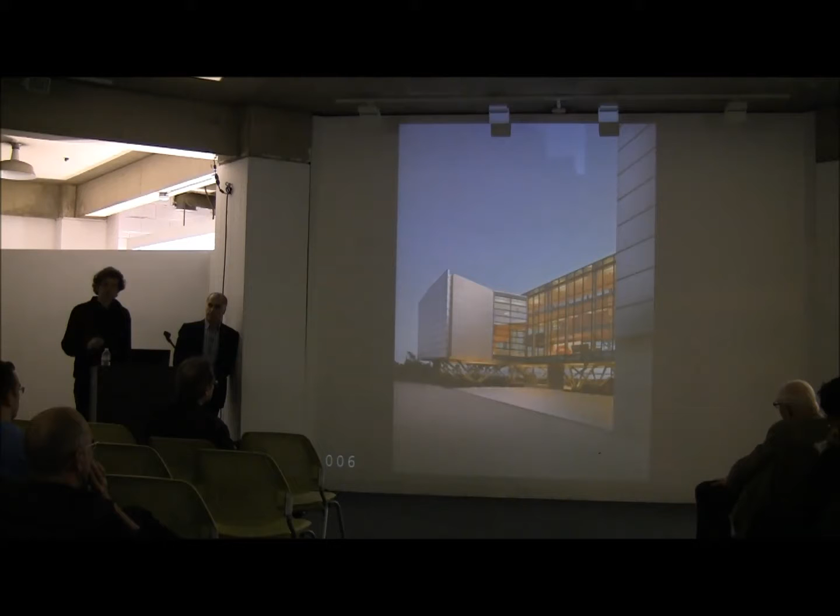And once in a while, as you see, the first house was a residential project. This is the last one we've done, actually in Florida, for a person who, due to a childhood sickness, was constrained to spending his childhood indoors. So he had this dream of living out in the sunlight, with maximum exposure to daylight, and on this spectacular site in Florida, he built his dream.

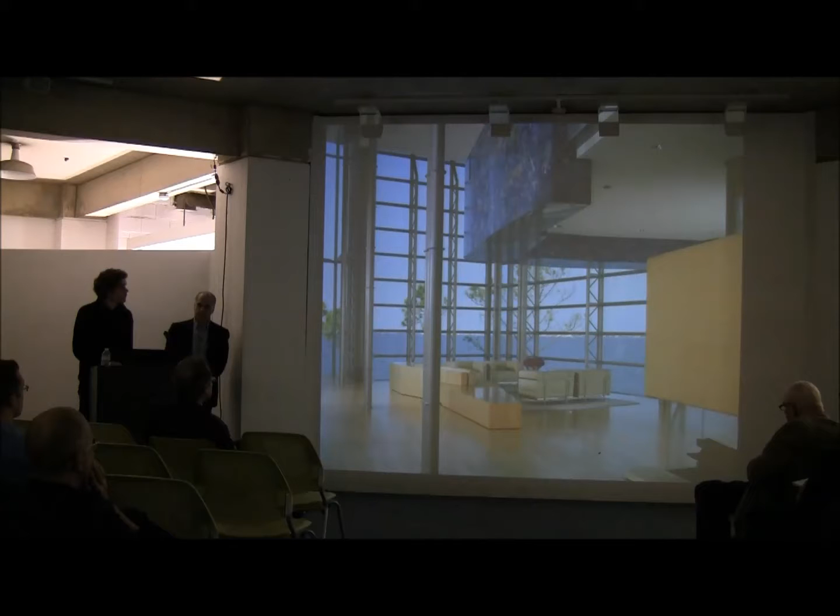This project, in my opinion, when you think of Ron and Mark's work for all these years, is unbelievable because it's pretty big, but it's like the whole house is a piece of furniture, because every inch is dealt with in detail like that. He also happened to be an art collector, so you get a sense of some of the works he bought.

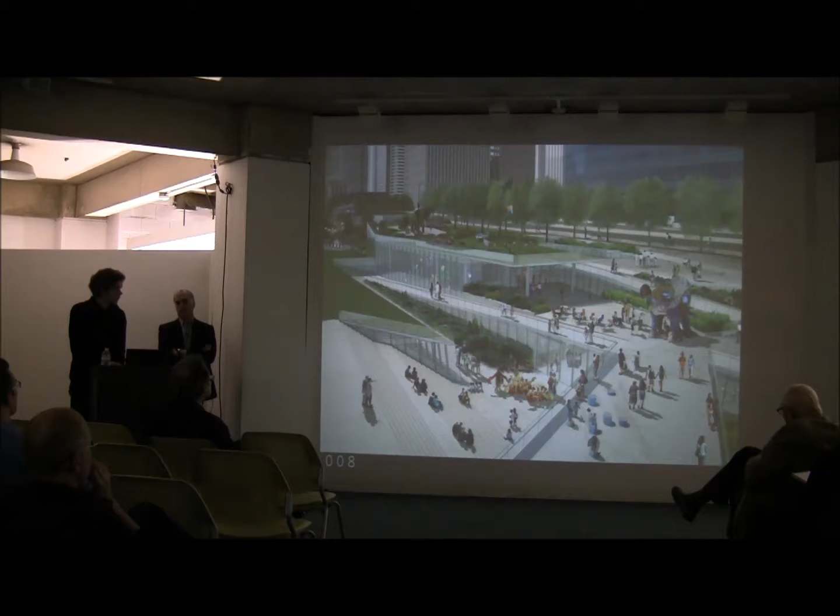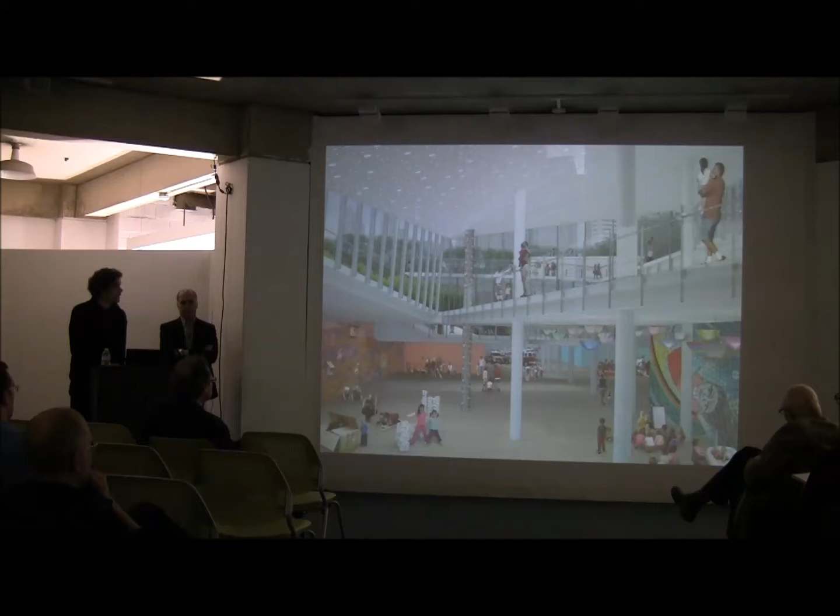Also in 2008, we were in the middle of the Chicago Children's Museum expansion plans, just on Grant Park. So those were some of the renderings. How do you put a building in the park without using any land? That was a bit of a controversy at the time, but it's actually very interesting for us.

Also, in a similar time frame, in 2009, we were one of the four shortlisted firms for the Eisenhower Memorial in Washington, D.C. So this was dealing with a personality like him and trying to figure out what it means. The short answer is basically that we said it's almost like a civic porch.

So you take this idea of this childhood home where he and his family spent lots of time, this great photography, and we suggested that as a solution for the memorial, which was then won by Frank Gehry, and is now completely stuck. Congress has pulled funding, and the future of this project is completely unknown.

So what we'll do is talk about 3 projects in greater detail, and each one is an interesting journey for us. The first one, as so many of you have seen, is the Crown Fountain, which is a great project.

This is what beautiful Grant Park looked like in 1930. Presently Millennium Park is where all the railroad tracks come together, just north of the Art Institute. What's interesting about this image we got from Ed Uhlir is I don't think there's one tree in Grant Park. So it's got the Buckingham Fountain, and that's it. And this was 1998, just a big hole in the ground for people who've been in Chicago. It's a forgotten memory, but that's actually what it really looked like.

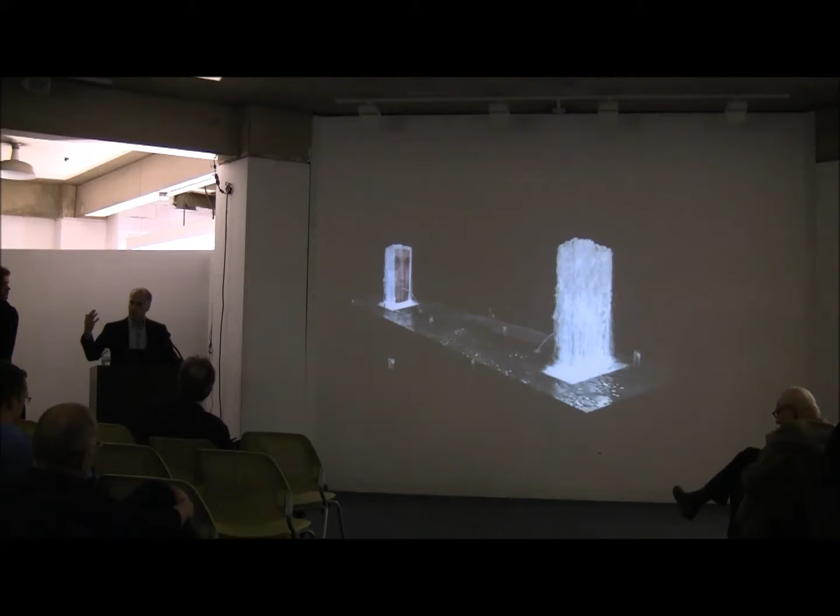You have to understand, you've probably all seen it, but at this time it was just a drawing and this idea. We said, it's so kooky and so unbelievable that it probably won't get built, so yes, let's start working on it. Whether we rationalized it or not, we said, well, they have no idea how to put it together. Like a client who says they want a building of X size with so many things - they had the ingredients, but not the ability to actually pull it together.

So we started working on it, but very fearful of the artist, Jaume Plensa, because we figured well, only an egomaniac artist would do something like this. So it's going to be a stormy relationship.

I showed this image because in some ways it looks really simple - the fountains, the plaza and what have you. And it's simple like ballet looks simple. It's supposed to look simple, supposed to be light and airy and have just a great ease about it. But anyone who's ever tried to do this in their living room knows it's pretty hard to pull off.

So what I wanted to do is talk about the process we went through. The thing about this is we actually came to the project without knowing anything about fountains. We had never done a fountain in our life, but we had this sense of material development that we've always been very interested in. The idea of developing materials in the assembly and working with the artist was a great challenge. Here is Jaume behind our building, looking at glass blocks. Again, it wasn't something you went to Home Depot or Corning Glass and ordered a bunch of glass blocks - we actually had to develop that product.

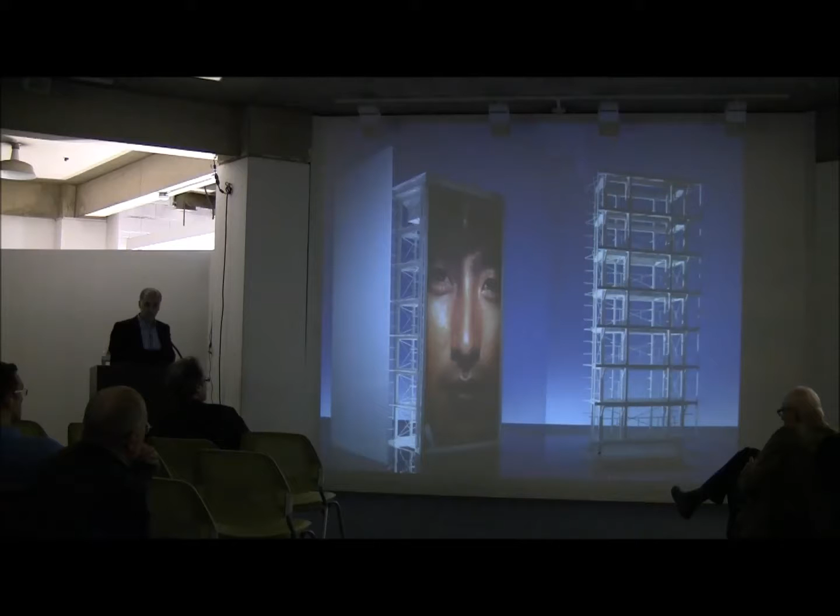The real problem was how you actually get what is, instead of a block, more of a tile. This shows the relationship of the structure in its place over the garage — there was a two-level garage here. You can see the load is taken and distributed on the floor and columns of the garage, and the whole control system is below that.

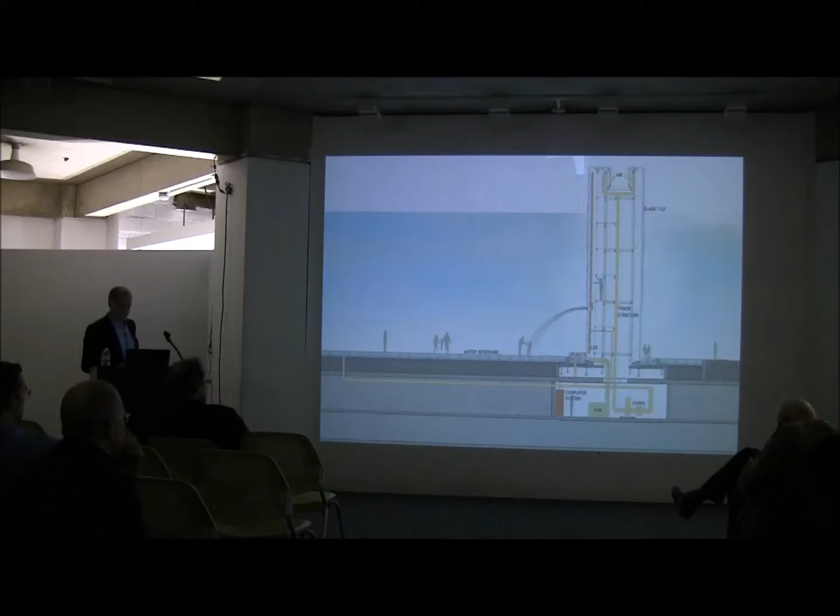There's basically a water reserve of about two feet under the actual area of the fountain, and all the controls are there. So after working on this for several months, we had this idea of how you actually put it together.

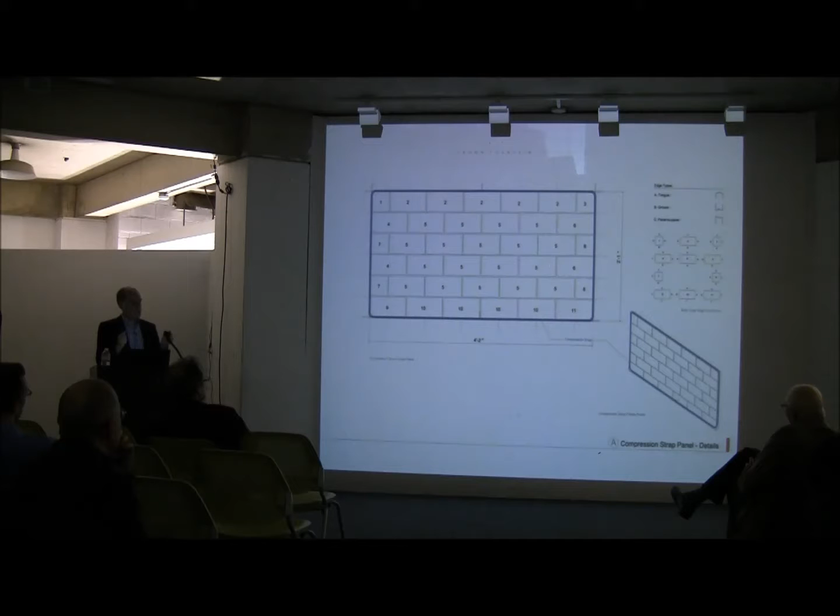We had this great idea of basically taking the blocks, linking them all together, and then putting a compression ring around it. This is a diagram of that compression ring, and on it there would be clips that we would then clip onto the panel.

So we actually needed to mock it up, and this is where we really perfected the notion of mocking up. We made it out of wood because we couldn't get the glass quickly enough. We put it in — you can see here, this is the compression ring, and we decided to make it like this. So there's the panel we were making. We lifted it up, and Steve Crown, who was the patron for the fountain, came in.

He said, yes, we figured it out where other people couldn't — there was another firm that worked a year and a half on this project and couldn't get anywhere, so we were the second firm working on it. He said, you came in and we moved this panel, put it vertically, moved it about a quarter of an inch, and the whole thing exploded. There were blocks all over the floor. To say we had our tail between our legs is an understatement, and Steve Crown is such an incredible person — he said, well, I'm really glad it happened here rather than in the fountain.

But for us, this was a major breakthrough, because it was the failure of this that helped us see the possibility. We said, instead of relying on the blocks here, let's pretend they're not there. Let's turn it upside down and say there are no blocks — we're no longer going to depend on the blocks for the structure. That's what led us to this idea of creating basically a T-net condition.

You can see here the gravity load is held by these T's. The block is simply put in to prevent the T's from twisting, but we're no longer relying on the block itself — the whole structure happens through the T's. It was that failure, like you hear so many times, your parents and professors telling you the failure is where you find the solution. Actually, in this case, it is true.

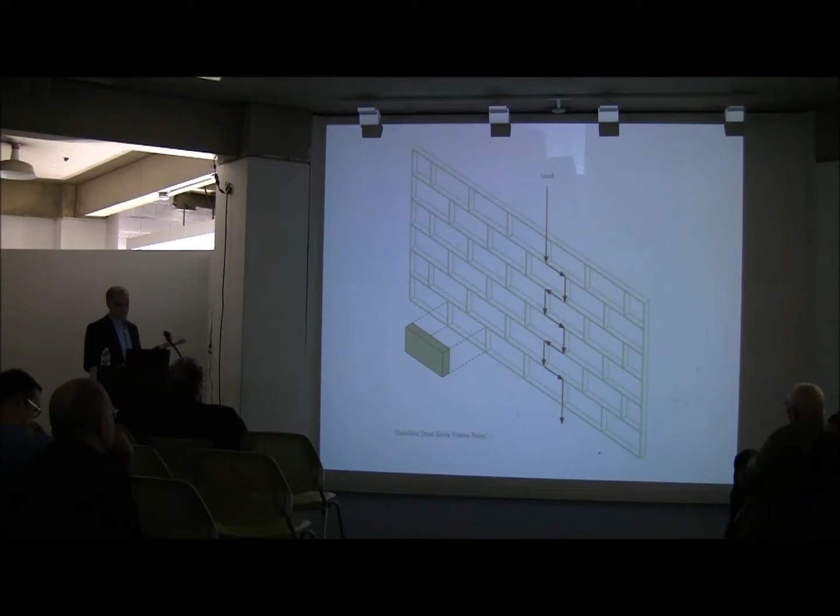By eliminating that, you can see here the actual structure is this T — the T's are on the inside. You can see it's mortised into the glass block, with just silicone on the outside. Again, we're not dependent on the block. This is a horizontal view — you can see that's the structural T, sort of a web. We simply take those T's, glaze them, bring them onto the site, and assemble them.

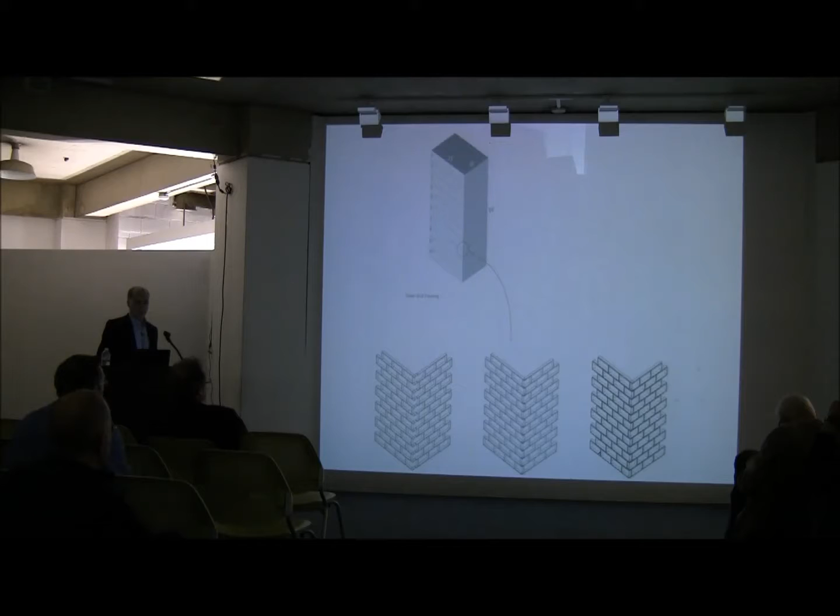So you can see here we teamed with a group out of Florida. Because the dimensions needed to be very accurate, they made a full-size jig to actually make the faces of the fountain.

And you can see them glazing the pieces on the floor. So on the left side is the actual T grid, which is basically, once that glass gets in, it forms a beam, sort of a composite beam that can resist both the gravity and the lateral load.

And the great thing, and it didn't dawn on us initially, but we realized that when we had the block and held it, you would never see our fingers because of internal refraction. You didn't see it, so if you go to the fountain, try to find all that steel. There's an enormous amount of stainless steel in that wall. You don't see it because of how it all works.

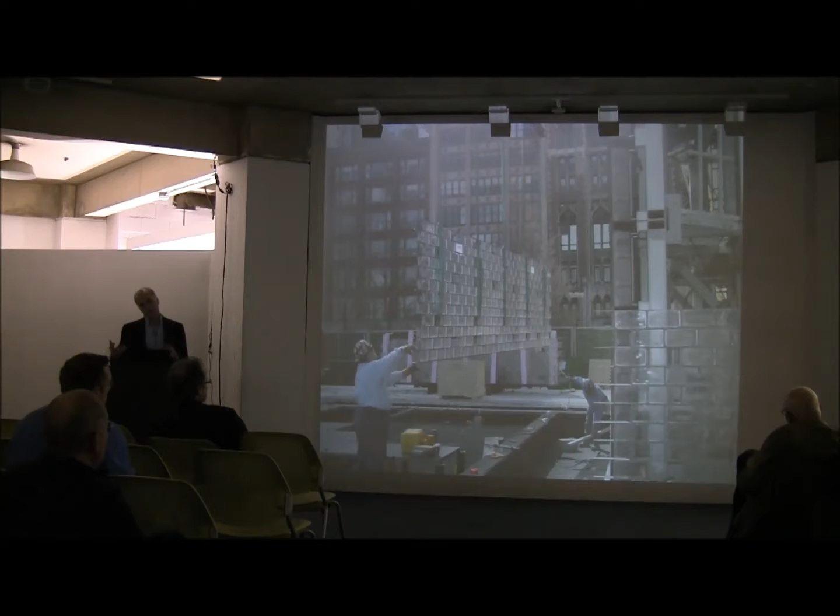You can see the pieces actually coming together. And for us, this is actually a thrilling part of the project because we're actually into putting things together and making it as simple as possible, even something that we didn't have a clear idea of how it was going together initially.

Once it's all done and it's hoisted in place, you can see here the straps, the blocks are left out just to hoist it in place into the glaze. So, very simply constructed. You can see the pieces.

And then the other thing is that the blocks themselves, again, only 2 inches wide. We wanted to have no sort of structural heroics here. We didn't want the structure to be expressed. We actually wanted it to be just very simple and veil-like. So we did what we call these outriggers. They're about 2 feet away from the actual structure, and the idea is that takes the lateral load.

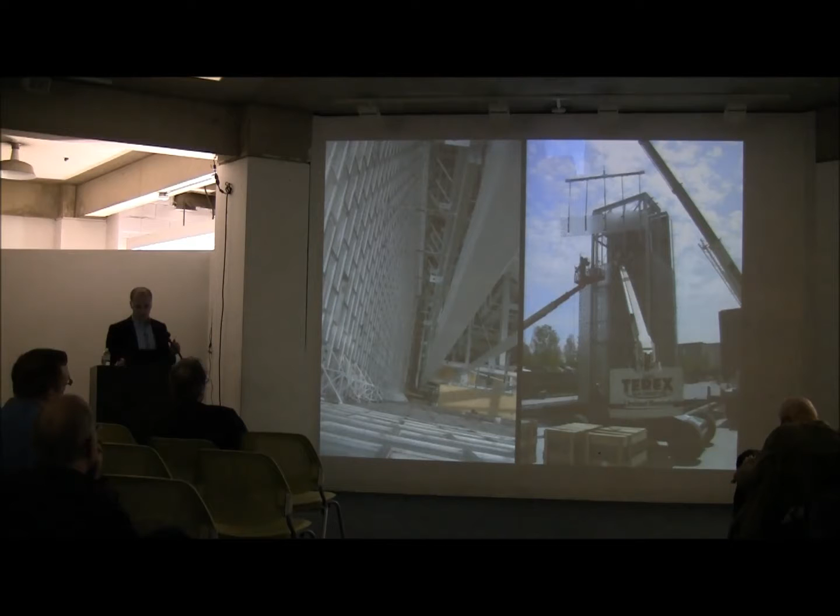So I just showed you how the vertical, or gravity, load is taken through all that stainless in the T assembly, and then this picks up the lateral load. Many fights took place over how many and where they were located, but it was interesting.

And then on the side that has the LED, you have the same lateral loads, so how do you support that lateral load when you have an LED wall? In our case, we kept trying to convince the LED manufacturer just to put a hole through his LED, and he kept telling us that would be a million dollars in re-engineering costs because it's all a component, sort of like putting a hole through your laptop computer, a little hard.

So we came up with this idea of just creating a little bit of a gap. And he assured us, the manufacturer who was an expert at LED, that you wouldn't see that. And so you can see it going up here.

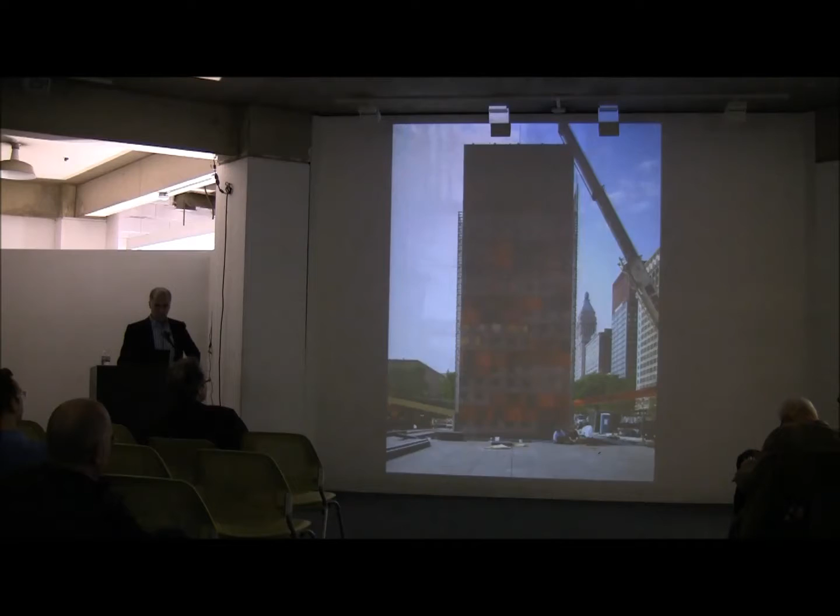We mocked it up again, the different types of LED behind our office. This is actually everyone together. That's Steve Crown in the tie, and then Jaume Plensa looking at it and making sure, the actual visual of his piece. Turns out that we became great friends through this process.

I mean, it was a great relationship, working with him and realizing what was his design, his concept, which is, I think, magical beyond anyone's expectations, but actually trying to fulfill what his ideas were. So authorship of the fountain was never an issue. He was the author of the fountain. We were simply the translator of making it physical.

But we think that's actually what architects do. They become the translator and make things physical. They create space. So in this case, there's the technology of the LED panels.

You can see here, this is sort of a shootout between two manufacturers in our alley. And then, because we weren't sure at all how it was going to perform, we had no idea, we actually mocked it up in the park. So it's about 20 feet high. We've got some panels of glass, and then actually put it up.

You can see the Pritzker Pavilion has no stainless on it, it's just the trusses for it. So we had the opportunity. And the great thing, again, working with someone like Steve Crown and the entire Crown family...

They wanted to always do the right thing, so this idea of sort of mocking it up and saying we don't know what to expect until we actually saw it was very important. And then we actually mocked up the entire screen just outside of Salt Lake City.

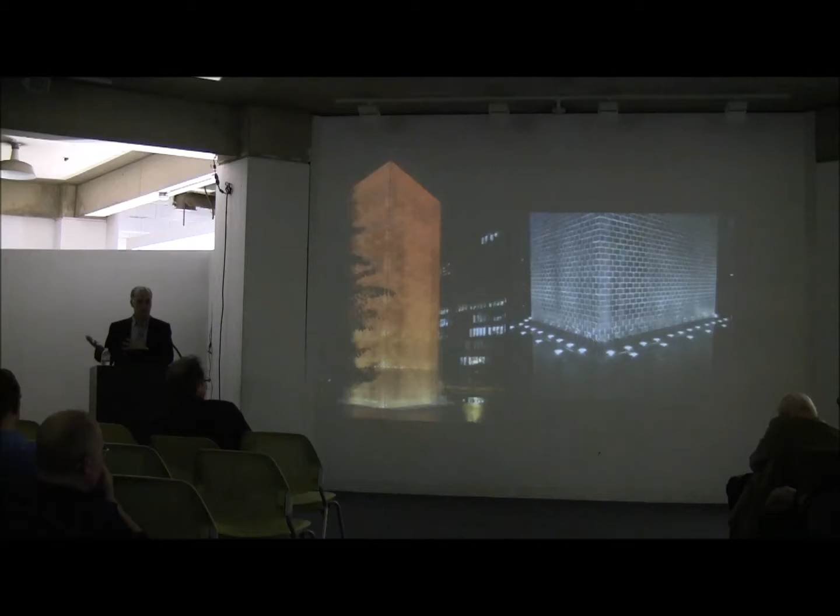Unfortunately, giving this fountain to Millennium Park or the Park District is like giving a Ferrari to a 14-year-old teenager. They barely get the gas in it. In fact, the story is you're supposed to clean out the filters like twice a day; we checked and it went months, and we still can't believe there's not some public health crisis, because given how that fountain is used, it's amazing.

And I just added these pictures of it, all of which you've seen and probably experienced.

But I think for us, this was like a profound change because it showed in a really physical way what art and architecture can do, and the power of art and architecture to bring people together, to celebrate life, to celebrate the physical and to celebrate something that is an event, and it's very simple.

So I think that's the thing that we really took away, and this became sort of a benchmark for us about how it would work, how a project could work, how even in a dormant period, winter in Chicago, a fountain can still be alive, how it's framed by the sort of beautiful gilded frame of Chicago architecture, how it really is used to celebrate life and to celebrate an event.

And I think this last image of the young boy became a profound sort of snapshot of how powerful our work can be. When you do an office building, even a house, it's not quite as single an image as powerful as this. So we ended up using this as a benchmark for how we judged other projects.

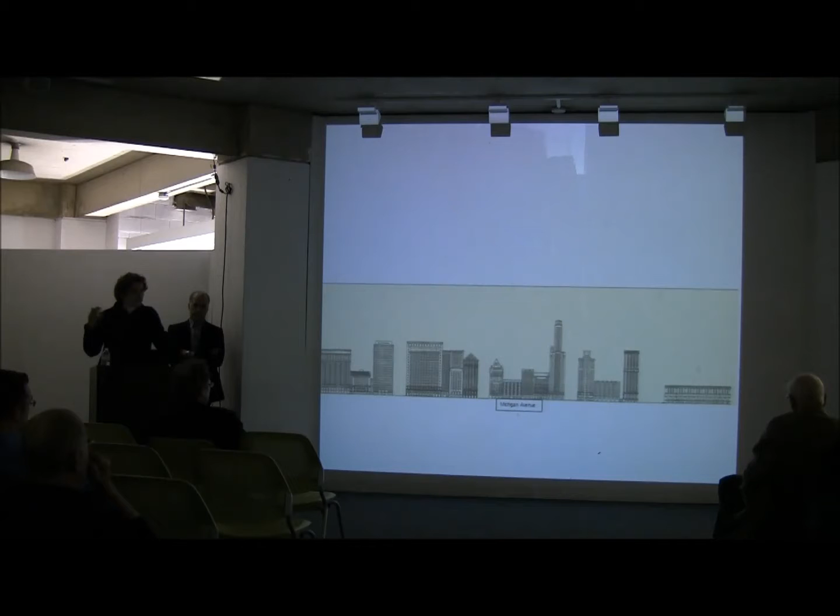But fundamentally, we thought it has to be contextual. I mean, if you have a street wall of that quality with a number of buildings by Sullivan and Adler and Root and so forth, there has to be a relationship to it.

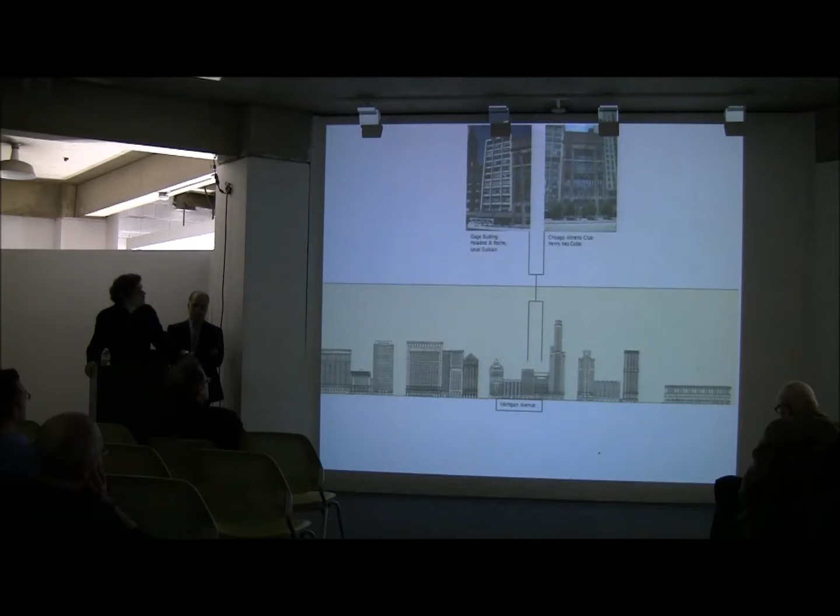And so as we did some basic research, looking at the kinds of buildings that were there, we noticed how, when you go up closer, how rich these facades truly are. I mean, they sort of look like punched window openings at first glance, but particularly if you look at something like the auditorium building, there's an incredible depth in the facade and a richness in expression, and quite a few of these facades are actually sort of modulated in and out, basically bay windows that were used in series.

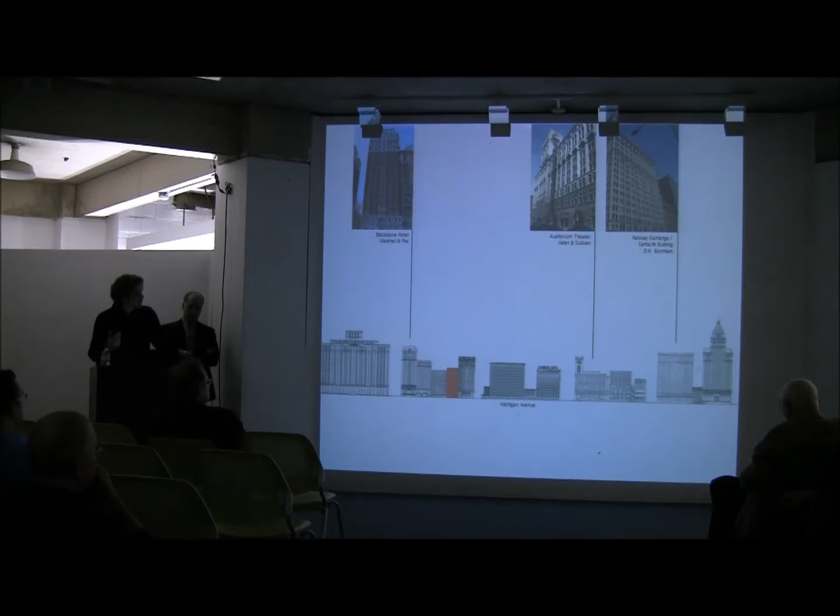And so that led us to think that there had to be some of that spirit in our model. Here you see some of these close-up shots where this articulation shows why the auditorium building is a great building. For us, it became clear because the people at the time, Sullivan and his parties, basically used the materials of his time to the greatest extent possible, and the way they articulated the stone, the colors they used, achieved a real rich appearance.

And in addition, this is something that both Ron and Mark have held dear when we talk about modernism—there's also a great interest in art in particular.

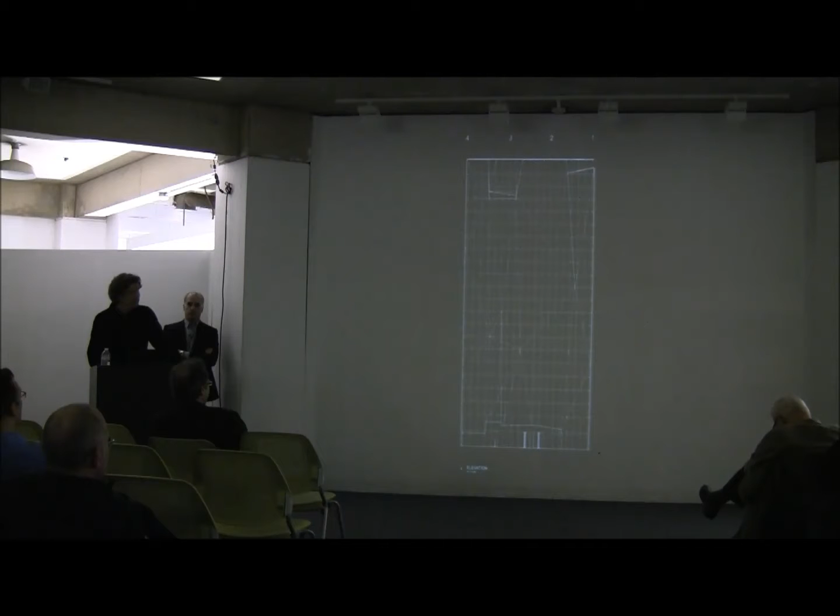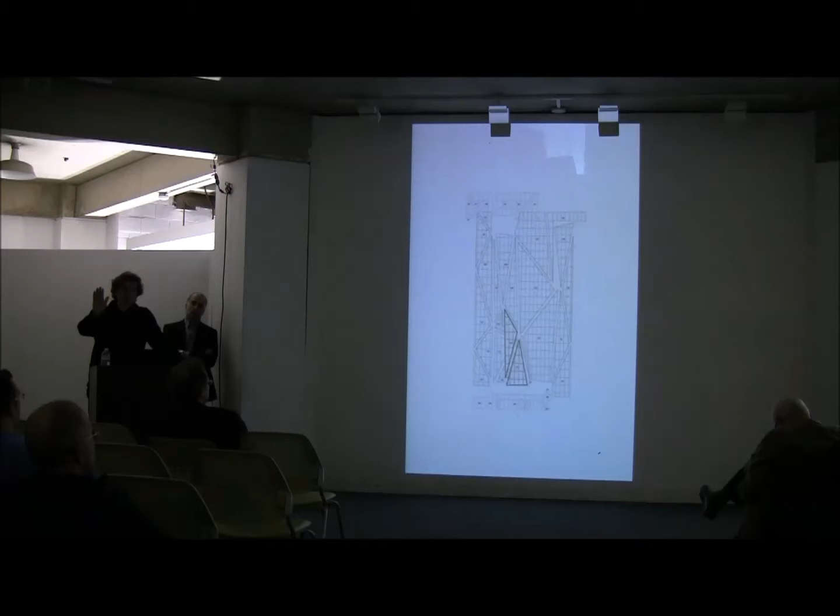So here you see some of the development of the facade, just in a plain elevation drawing, and then the pieces, basically the facets that make up this geometry.

As you pull these pieces apart, I think the story here is too, when this rendering was shown to the mayor, this was a meeting I wasn't at. We were expecting them to say you have to tweak it again, but they all said, yeah, looks great. Then the challenge was, since we're talking about making it, how do you actually make it? Yeah, we had no idea. We just sold it to the Spertus Institute and the city, and because we thought for sure everything would be rejected since it didn't have red brick and wrought iron. We got the approval, and we said, oh my God, now we're really in trouble, because we had no idea how to put this thing together.

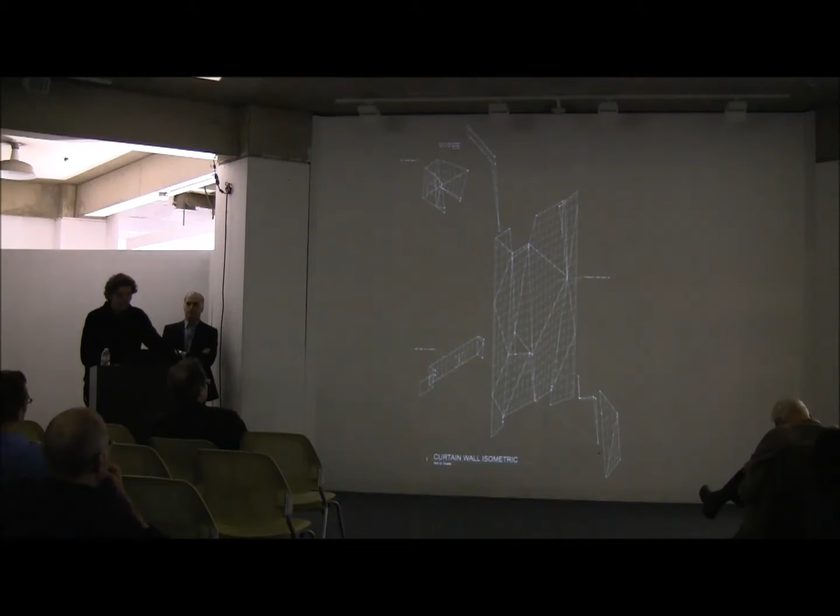In that sense, it's interesting compared to the crown fountain we just talked about. The crown fountain was basically a series of planned failures, mocking up and trying and finding out through that. It turned out not very different here, a little more traditional as a curtain wall, but it had a lot to do with testing in real time. So the fundamental issue was when you have a geometry that zigzags in plan and also leans both ways in section.

If you just took regular curtain wall and tried to stack it up, it doesn't work, those mullions are always going to misalign. So the breakthrough here, in very close collaboration with curtain wall engineers, was developing this mullion as an aluminum extrusion, one piece where the alignment is always exactly the same. You can lean in and out, but that radiused front of the mullion allows all the various geometric alignments.

You can see how that same mullion works through a very simple change, you just swap out this one piece. You need a bunch of those to allow for all the angles, but everything else stays the same. That was part of the way to make it work, but also make it affordable. Ultimately, the outcome of all of that is this faceted glass geometry that you've probably seen.

It's also the whole idea of, I think when we decided to go all glass, we were always amazed by the view. This is actually one of the few buildings in the South Michigan Avenue stretch where the public can go up, and then you look back over Grant Park and Lake Michigan. So that was always a big part of the idea.

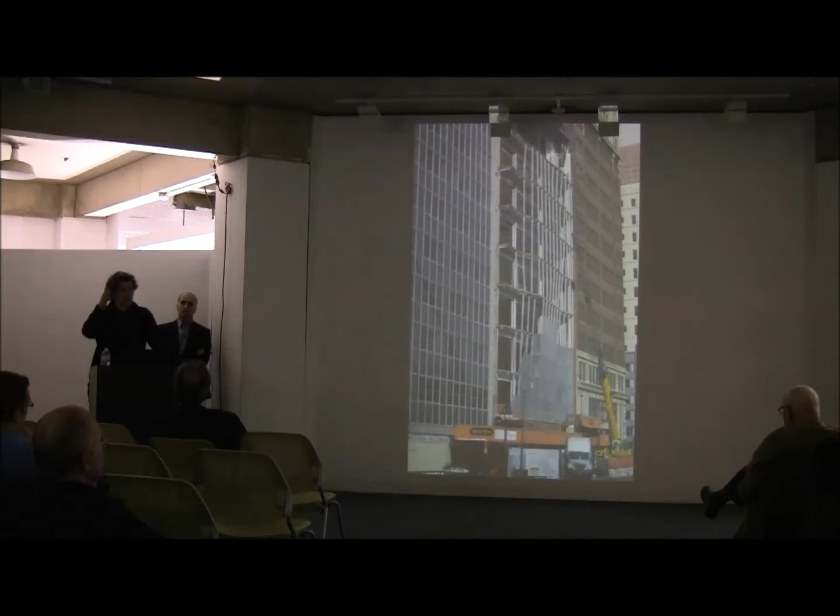There were some scary moments, but the other amazing thing is this highly articulated system actually went together incredibly well, much better. This is a very interesting lesson. This went together way better than like an acoustical 2x2 ceiling tile, which has been done for decades and you just pick it out of the catalog. But there was actually this sort of care of the engineering that went into this that made it go together real well, and the ceilings looked—you know, like they were misaligned, you had to almost fight as hard for them.

I think what we tried to achieve, in addition to giving expression to Spertus as a Jewish institution, was a building that represents them, that has an appropriate expression of the Jewish experience. And so that had a lot to do with the folding of the facade.

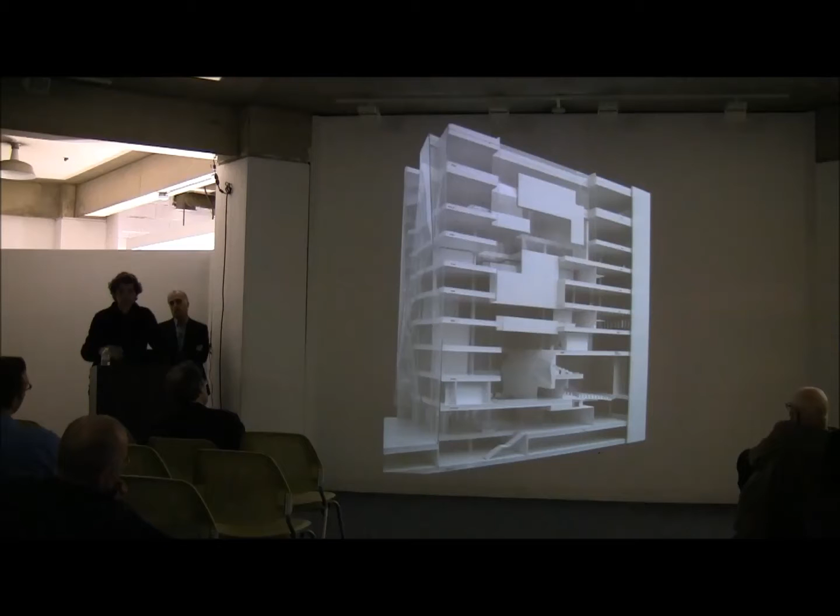And impressions of the building with its context. There's also, other than the facade, a 10-story atrium that went from the very top to the bottom, with a skylight that basically drives daylight into the building. There's a 400+ person auditorium on the second floor.

And then some interior impressions. The interior was kept very neutral, shall I say, because light had a lot to do with this idea of making an appropriate expression for this Jewish building. And so the entrance sequence, with open grand stairs so to speak, takes you out to the auditorium.

This building itself—and then as you come up, this is the 9th floor and the 10th above, you can actually see where the daylight comes in with the skylight above. So these are the two or three floors where really this daylight sort of washes in, and you get some sort of layered planes of glass.

And then looking back, this is looking back towards Michigan Avenue and the lake. Spertus had always—even the building they were in before—was like a layer cake, which is the most typical building, floor after floor. But because Spertus is this multi-functional institution, with a college, a museum, a library, and a lecture hall, they said we really want this energy that is Spertus to be felt, we want there to be connection. So that drove a lot of these kinds of openings in the floors, so that no matter where you go, you're aware of the other activities in the building as well.

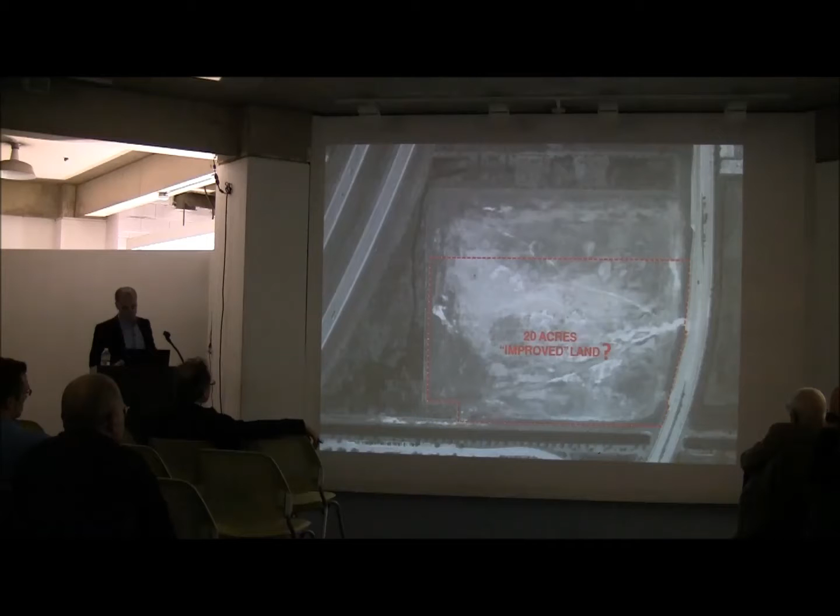This became sort of a design element. Actually, the most important design element was: what is the land? What does the land want to be? Well, the land wants to be what it's been for 10 million years—it wants to be Everglades. It doesn't want to be 24 inches of pea gravel, not at all. So our idea was really what should the land be, and what should the building be.

Going back, though—in 1962, Senator Daniel Patrick Moynihan actually started Design Excellence. It's a fairly easily comprehensible document where it says the architecture is to reflect the dignity, enterprise, vigor, and stability of the American national government. That it is to embody the finest of contemporary architectural thought, qualities that reflect the regional architectural traditions.

In this case, it looked to be Taco Bell, because there were a lot of red tile roofs and bad, leaky, dry conditions. And that an official style must be avoided—these are all in the government documents. It's incredible that the federal government writes something like this, that the design must flow from the architectural profession to the government, and not the other way around.

We thought that. So we actually harvested all of this as ammunition for how we would approach the design. The development of the building site is actually the first step in the design process. So these are some of the things.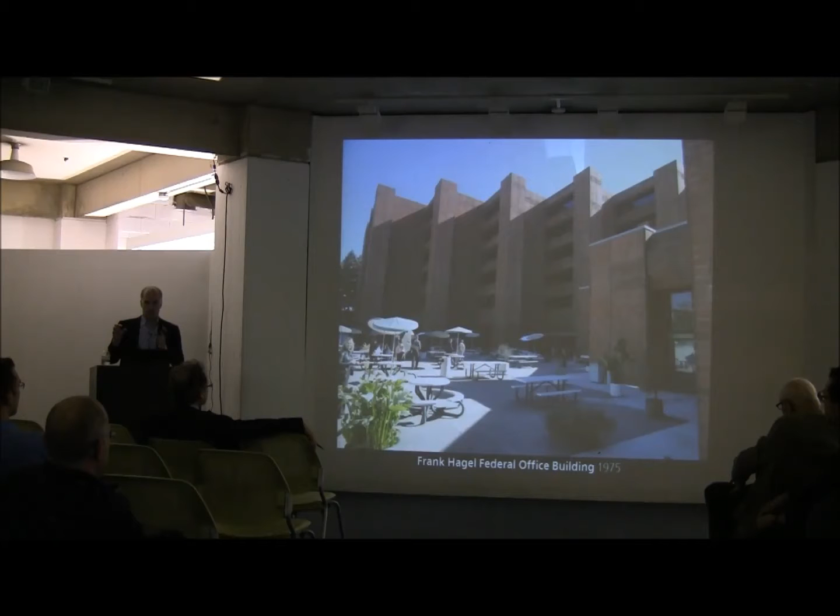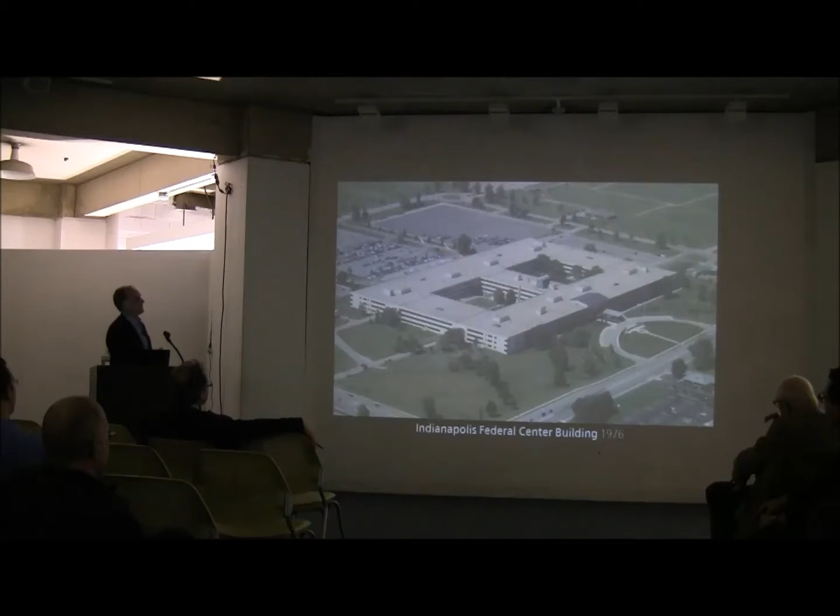There's also really bad examples of federal architecture. This is a project we actually went after—they loved 40,000 square foot floors where you were about 100 feet from a black tinted window. Sort of a disaster. They also got real efficient: let's just make them as big as we can, crowd a lot of people in, and it'll be a great place to work. You can see real sensitivity to site and building there—so, not great.

So our approach to the site was to look at it—this is actually our submission. We have a federal office building, in this case about 400,000 square feet. This is parking. There are security requirements, very large security requirements, a secure perimeter.

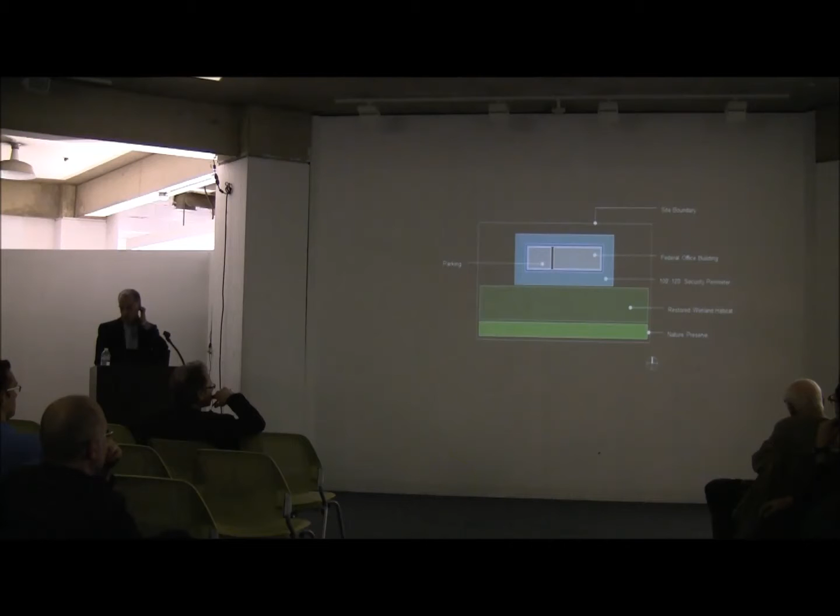This is the diagram of how we approached it, with this idea of restored wetlands, and even a nature preserve. These were our diagrams for how we would approach the site without knowing too much about the site or the program yet.

Then start paying attention to the enclosure, roof and walls and what have you. HVAC lighting controls to make those work. And then ultimately the fourth one is alternate energy, PV, solar cells, what have you.

You don't missite your building and then hope to make it up with wind power. That's not a good approach. Site your building correctly, give it a great enclosure, and you're more than halfway there.

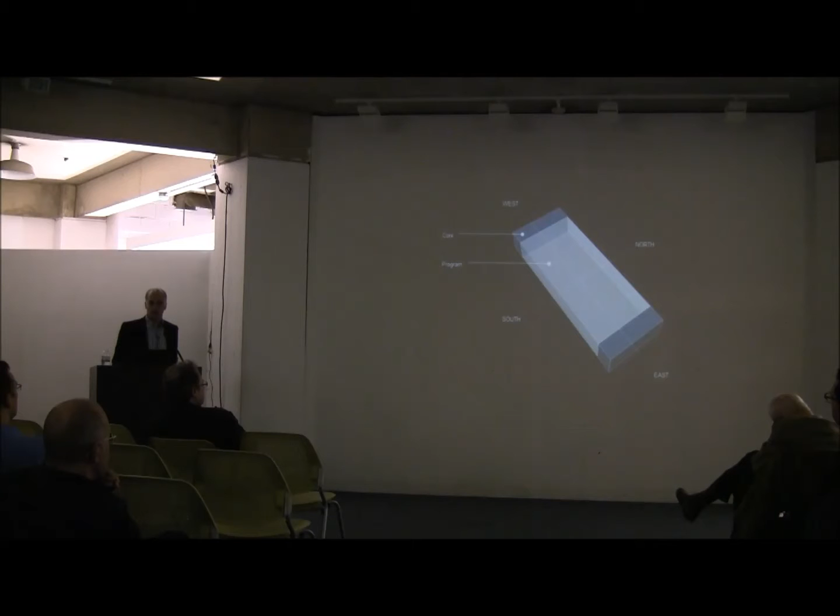You orient it to the axis, the long axis on the east-west side. So your solar radiation is blocked on the east-west side, and the sun is high in the sky on the south side. Also, it's very good with bomb blast, which is the reality of working with the federal government on buildings like this—bomb blast is a big issue. So you have to make that part of the design process.

The issue with this, however, is it's an enormous floor plate. In our case, we wanted to have a floor of maybe 60 to 80 feet wide because of just the efficiency of it. Again, you can create courtyards.

And then we take a section through this and look at it in section. Start to think about the building. Again, this is not programmed, but it's sort of an approach to design.

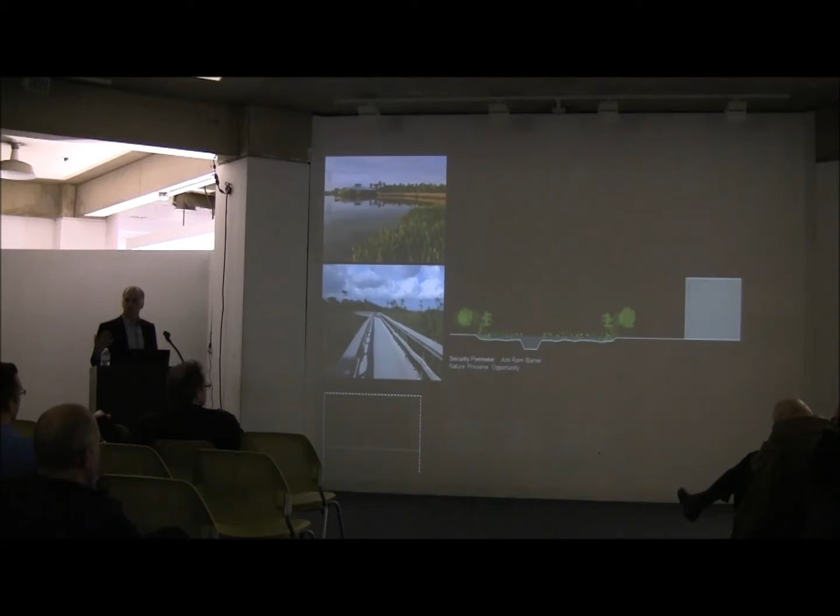Secure perimeter, where you can do it with either a big fence or a moat, or you can actually take the existing landscape, which is actually Everglades, and make the secure perimeter Everglades, which is what it wants to be. So we said, that's a much more secure area and much more beautiful to look at.

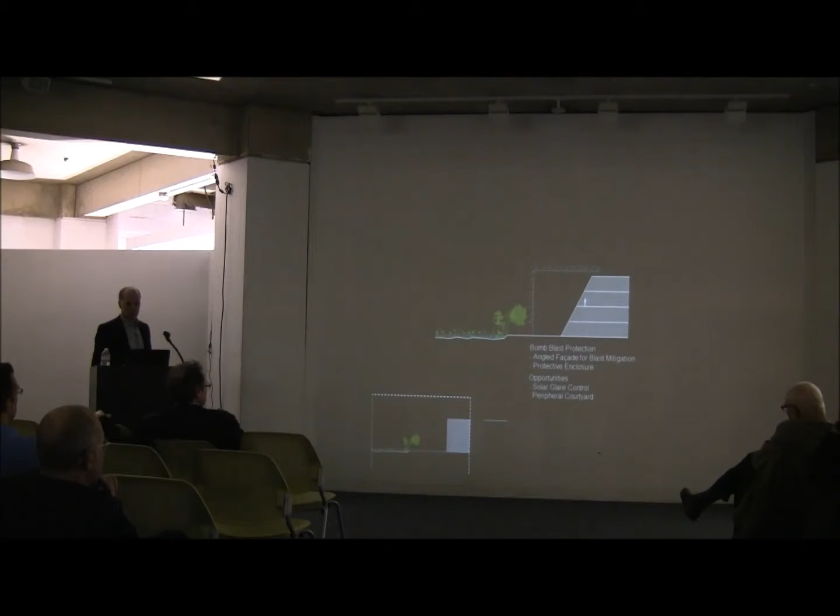We can, again, with bomb blast, shape the building. We can screen it, also for bomb blast and for sun. We had some experience with that. View out is still really important. So these are these simple, almost kindergarten sketches about how you approach a design.

The end, a courtyard—this idea of how you can bring light into a building and have it, in this case, very light. But you still have South Florida sun conditions. You can use the building actually to shape it and mitigate the sun. So here the sun's not a problem because of how that works. We had experience with that in a project.

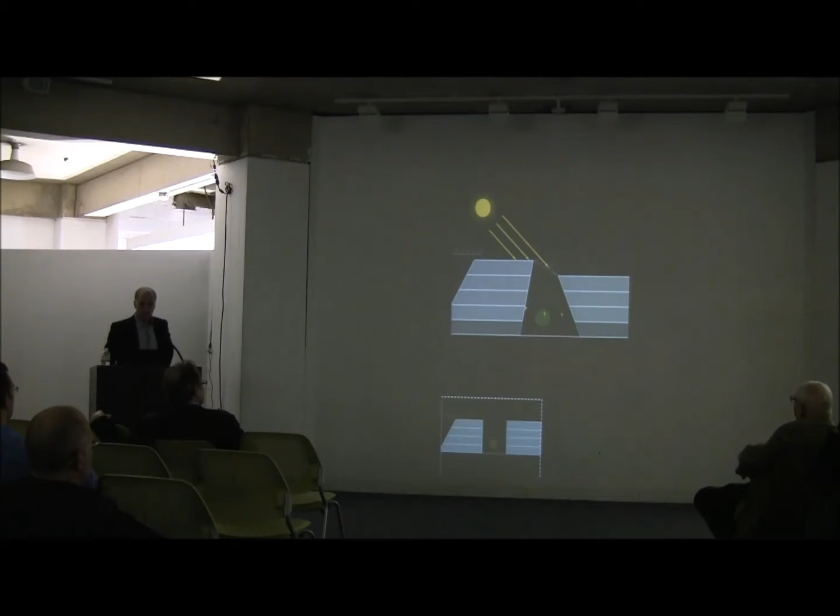So we were just taking our palette of materials and thinking these could all be used and adapted to this design—diffuse light, also attention to the movement of air, so you can have openings, courtyards that allow the breathing of those courtyards to happen.

And then a really important part is comfort—this idea that if any of you have been to Florida, it seems to be particularly an epicenter of walking in and being frozen and blind simultaneously, right? Because the temperature drops 20 degrees and the foot candles go from 10,000 to 35 and you're blind. So we said, no, the process of designing a building is designing the process of entering it. Here you can see, upper left, temperature of 90 degrees, 10,000 foot candles.

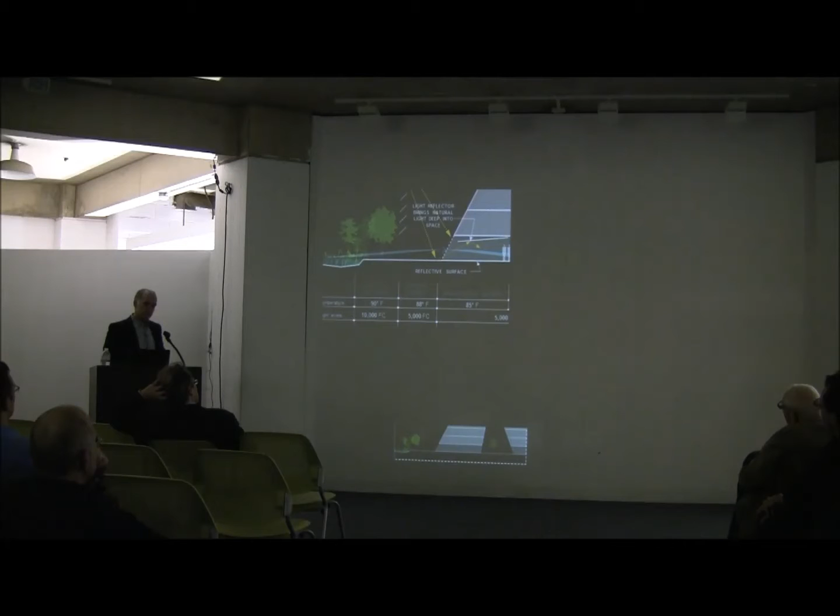By creating just a little bit of an enclosed area, a covered outdoor area, you can drop the temperature by 2 degrees and cut the foot candles in half to 5,000. You can then have a semi-outdoor covered area that would drop it another couple of degrees and drop the foot candles from even 5,000 to 1,000.

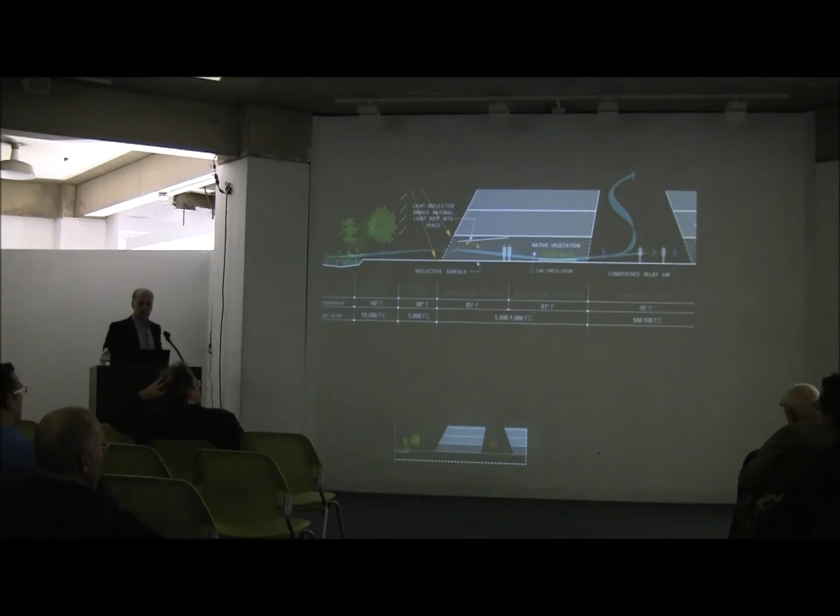Semi-outdoor control, which means through ventilation, some movement of air, you can drop it even further—again, sort of a controlled area for an atrium courtyard. And then finally, entering the building at 75 degrees and 35 foot candles. So there's this process that as you go through and into the building, there's a conditioning of every member that enters the building through this journey.

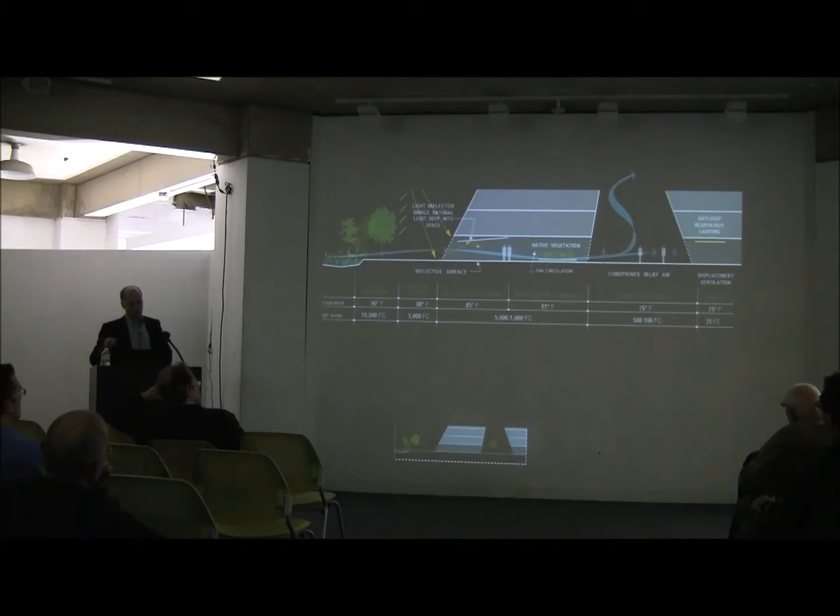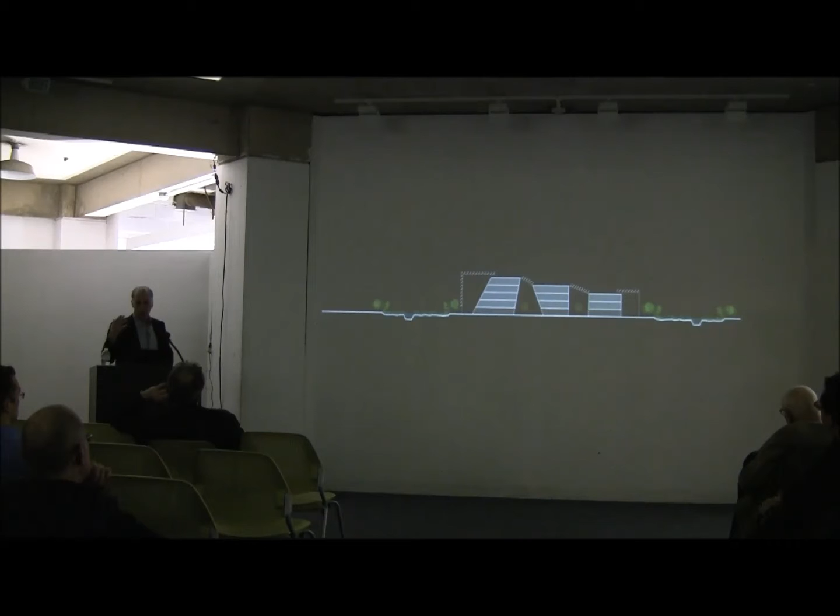This is what we were pledging if we were selected for the design. And then finally, this whole assembly of building also had one other ingredient, which is sort of undefined. It's hard to nail what it means, but the building had to be iconic. So what is an iconic federal building? We don't know. We know the Capitol is an example of an icon, but that's the thing that was required here.

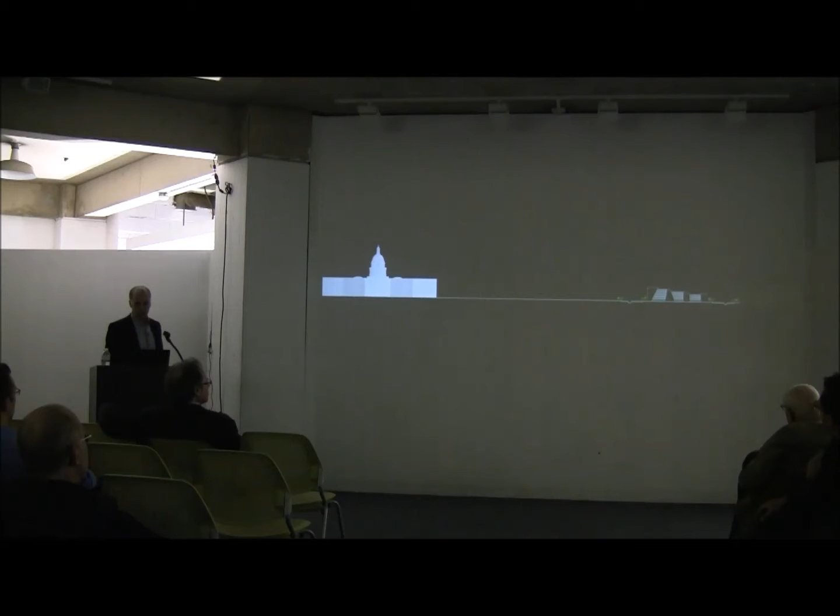And just as you're here, if you remember the diagram, we said we're going to basically cut the office building into bars that are 60 feet wide. So basically those 2 main bars are just that, they're very narrow. And to me, this is actually a bit of, in a way, we're really singing the government's praises in this case when they have a program like this.

The sad reality is when you practice outside, particularly in a city like Chicago, all these developers know exactly what footprint yields the greatest profit. So it's a box that's 120 feet wide, fits the right amount of elevators. Here, to me, what's really thrilling, mostly because we were able to take the regular office box, slice it in half and pull that apart. It's not necessarily new in the world - there are other places where stuff like this has been done - but I think here, hopefully, projects like this are really important, and the government's taking the lead in actually allowing this to happen.

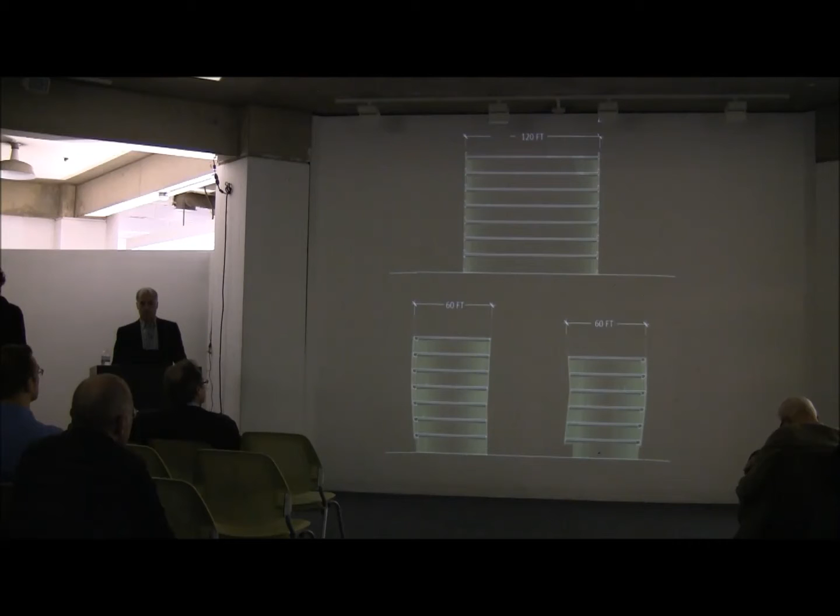And this is a bit of the analogy. If you have a building that's 120 foot wide, this is the typical size - you get a certain amount of daylight distribution. Whereas with 60-foot bars, you basically have just that - you get significantly better illumination from both sides. And then not only that, but you also get the view out.

This had a lot to do with the full height glazing. Looking at the sky is nice, but in this case, the Everglades that we wanted to bring back are actually really beautiful to look at. And so this gives you an idea that on any of these floors, particularly the lower ones, you're now physically connected with nature, which I think is also a meaningful thing.

And Mark, this was about the... Yeah, in the case of glass, glass is not a great insulator, but when we only have a delta of 20 degrees, 95 to 75, it actually is wonderful. It really works. In Chicago, a little tougher, but in Florida, we have that difference - it actually works quite wonderfully.

The challenge happens on the east and west sides, where the sun is low in the sky, and South Florida is brutal. So you have morning and afternoon sun, even though they're small sides of the building. So what we ended up doing is just putting all our exit stairs on those ends. You can see we use the exit stairs as sort of an insulated buffer, if you will.

It ends up being about a 12-foot space, and if those stairs, which are still communication stairs, have a different temperature of 10 degrees, it's such a transition space that it's not a problem. It ends up being sort of a buffer zone. So again, in the summer, it's the spring and fall that becomes a problem here.

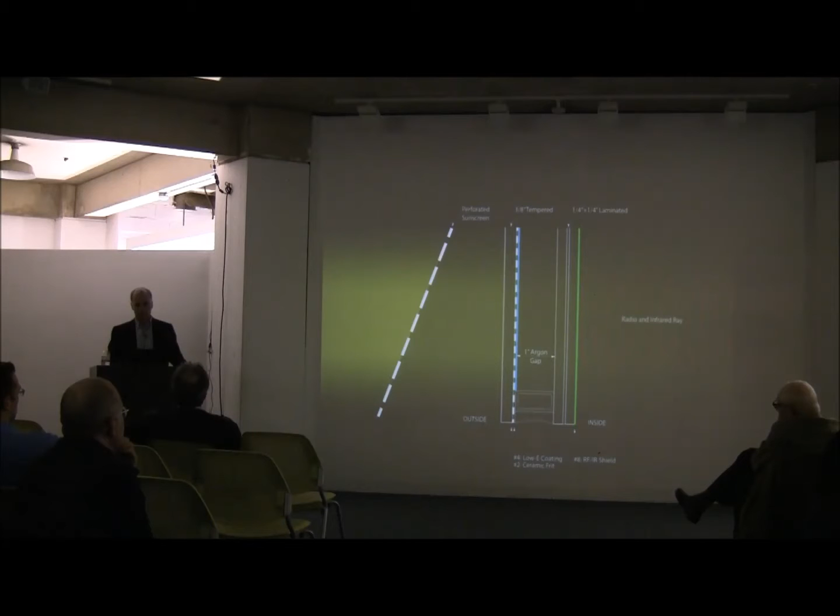So here we are after 30 years of doing glass buildings, and we sort of thought—well, I think somebody asked, one of the owner's reps probably, 'So what's the spec of the glass?' And we said, 'Well, we don't know yet.' And they said, 'What do you mean? You've done this forever.'

Well, the answer to that question is sort of illustrated here. When you saw that diagram that Mark showed with all these layers, we basically had to fight and talk over and over about how we needed to do a mock-up. If you remember, Crown Fountain was basically built by mock-ups. That was one of the key lessons, so we were not going to let this go.

And we said, let's do a mock-up, but let's even take this glass and put it on a trailer. So that trailer can actually be driven around on the site—east facing, south, west—so you get a true representation of what it's going to look like. I don't know how many we ended up making, but 13 of them on the trailer.

And just with different manufacturers, you put the low-E coating on surface number 2 versus surface 3—all these things get infinitely complex very quickly. And you get a sense, even with this projector which is pretty good, that the difference in appearance is unbelievable. I mean, from this peppermint green to a blue one.

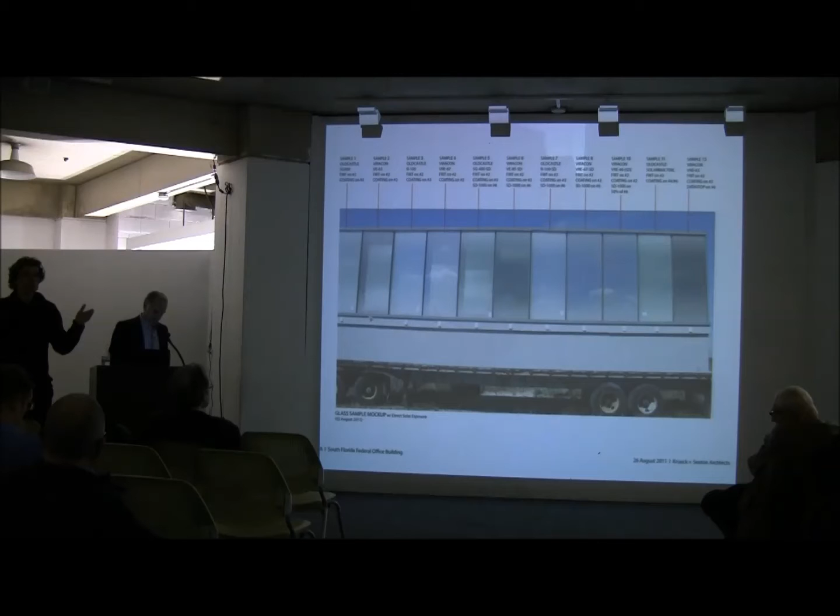So the long story short is: we think we know glass, and to some extent we do, but on some other level we really don't. If you ever do a project out of glass or any material, you should never trust what you think it is. If you have a sample in your studio, take it outside, do it bigger, and you will be surprised what you learn and how different it can be.

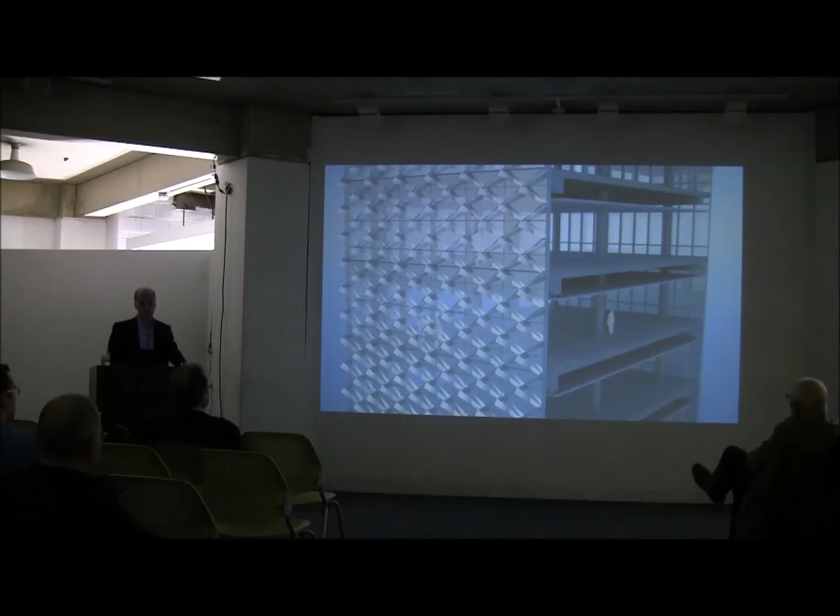So in South Florida, again, because of the low sun—even on an October day where it can be 80 degrees—that sun entering the building, as well as glare entering the building, was a big issue. So we developed this solar shade.

This is a fairly advanced wall system called a unitized wall, and we basically developed this perforated shade system using almost chevrons, because we loved the idea of using the least amount of material to actually mimic the tracing of the sun. The sun starts low, goes high, and comes back down again.

We actually found that doing the same thing with the solar shades, rather than the typical horizontal, was actually very appropriate. We could get more protection from that early morning and late afternoon sun by doing that. You can see these are some images.

And here's an example of a little animation we did for December 20th. If you look on the floor, you can see as this runs, sort of the dappled light—it goes 10, 11, 12—so you can see it's changing and dappling on the floor.

1 o'clock, 2 o'clock. That's all right, actually, for December 20th, because even in Miami it can drop a bit. The problem month is actually more like October or March, where the sun is still lower in the sky, but now it can be 80 degrees.

So again, if you look at this, just watch how little dappled light happens on the floor. This again is taking away the direct solar. In this case, it was a high security law enforcement group that was occupying the building.

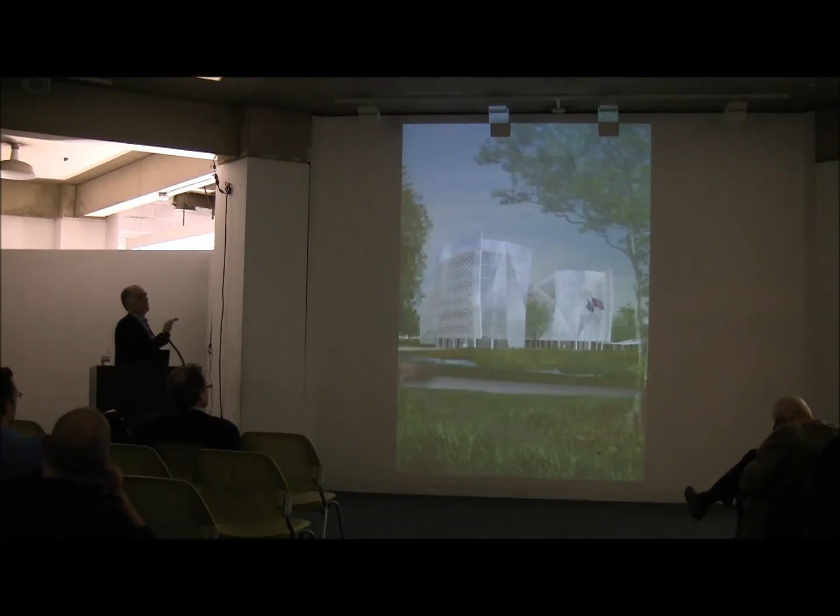And we also, it's amazing, we convinced them to build this with these images of sort of the building, this sort of white building, if you will. Now again, these are renderings, so these are big-ass lies, we think, because we have no idea whether it's actually going to happen - you have to sell it like this. But sort of the amazing thing, again, this is our building in the Everglades.

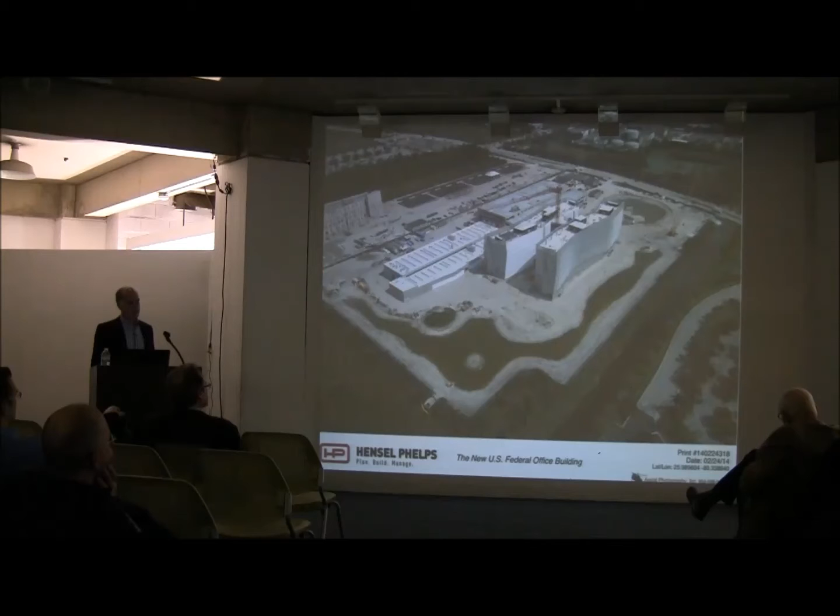But this is actually under construction. It's going to be finished in September. These are the actual photos - you can see the site with the buildings in the Everglades already starting to form. That's the south, that's not a rendering, that's the real thing. So the attention to detail - that's the same site. What's amazing is it's the same building, same, but just a little bit different condition.

And it shocked me. I immediately sent this to Ron and Thomas - you guys won't believe it. This building's white, which is amazing because that's, of course, what we sold the government. These are the solar shades, which you can start to see form this beautiful pattern, almost a chainmail type pattern on the facade, and really work quite beautifully in performance.

So that's sort of the building. I'll end with just these last two. This is what we found as architects. Instead of always thinking, as we do, immediately running to the building and the object and what have you - if you in fact think a little bit higher, as the very first picture of what it could be - we found this was the site that we found, and this is how we're leaving it. So I think that's the real duty of an architect: not to think about just the immediate enclosure, but really think about the totality of how you impact the entire environment. And in our case, we said the most important facade of this entire project is this facade here.